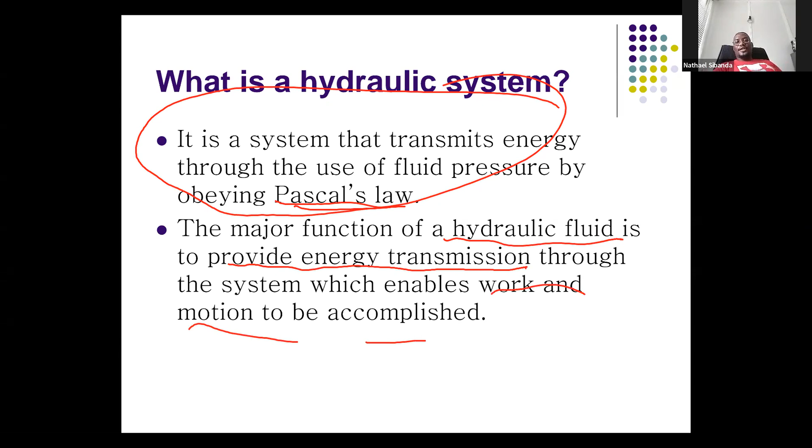So the major function of the hydraulic fluid is to provide energy transmission through the system, which enables work and motion to be accomplished, right? The major function of the hydraulic fluid is to provide energy transmission through the system, which enables work and motion to be accomplished. All right.

So, Pascal's law, guys, says the pressure applied to a confined liquid is transmitted without loss throughout the entire liquid and the walls of the container. And that is what I was saying before. Let's say you have a container like that, and then you have a piston here that you can press. Here you have your foot pedal. This is the liquid here.

They are saying if you apply a force here, that force per unit area will become pressure pushing on this liquid. This pressure will be equally distributed in all directions and on the walls of the container. So the pressure applied to a confined liquid is transmitted without loss throughout the entire liquid and the walls of the container. That's Pascal's law. So take note of this and memorize this law by heart.

Now, this application of Pascal's law leads to this. These guys were jealous of each other. Like Newton: if you read science books well, you'll find that many of Newton's discoveries came from his cleverness or manipulation. If someone discovered something but had no money or means to sort out patents, which was difficult in the old days, people like Newton and the other moneyed ones would say, on your behalf we'll do this, and then it appears in their name. But others, such as Pascal, were not as popular as Newton.

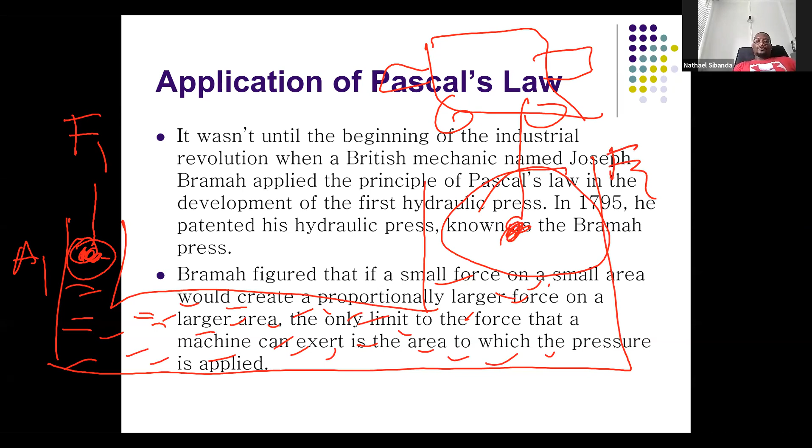He discovered that if you apply a certain force F1 at a certain cross-sectional area A1 of this piston, you get a certain force F2 going upwards at area A2. So if this force is applied down on this side, another force will go up. But Pascal said the pressure applied on this liquid will be equally distributed throughout. Which means the pressure P1, which is F1 over A1, must be equal to P2, which is F2 over A2, because of Pascal's law.

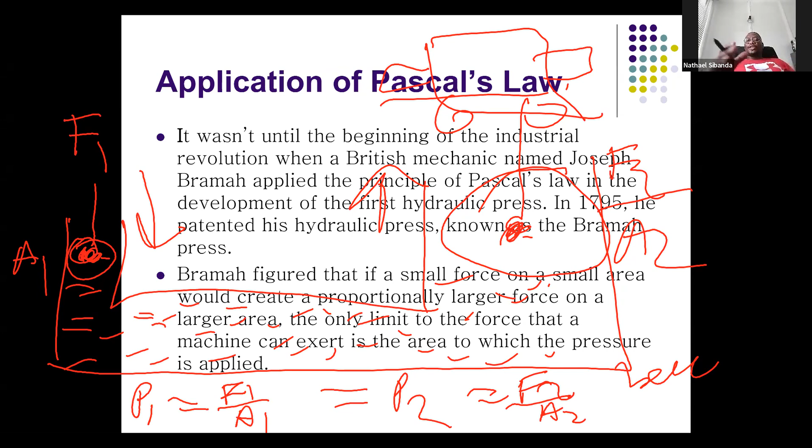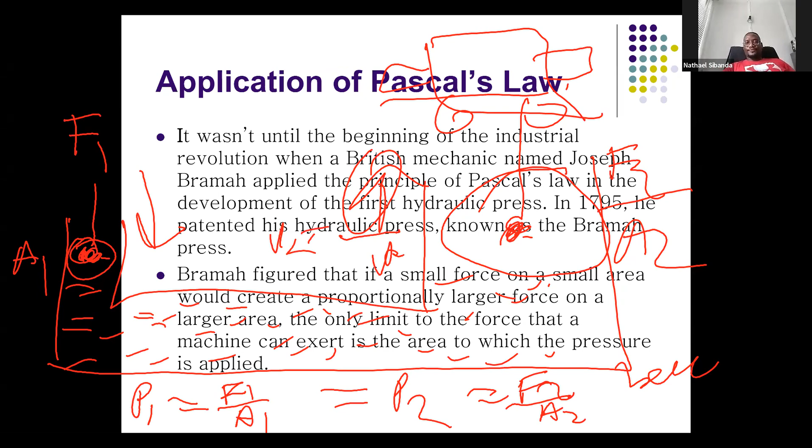So that's what Bramah discovered: if you apply pressure at a small area on a hydraulic fluid, it will transmit that pressure equally without loss through the liquid and the walls of the container. Hence, you will receive a force F2 over area A2, which is equal to P2. But basics, before we go too far: pressure is equal to force per unit area. That's basics from high school, or from maths, that you should remember.

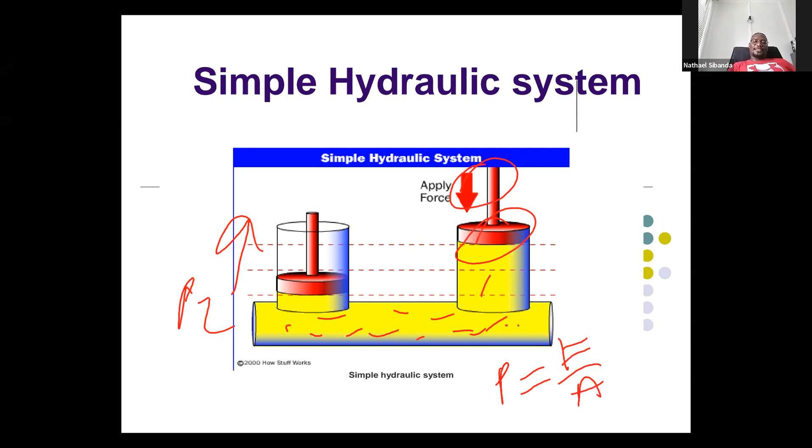Now, this is what he discovered: if you apply a certain force here, the pressure P1, which will be F1 over A1, will be equal to P2 on the other side, which will be F2 over A2. So Pascal's law says P1 must be equal to P2.

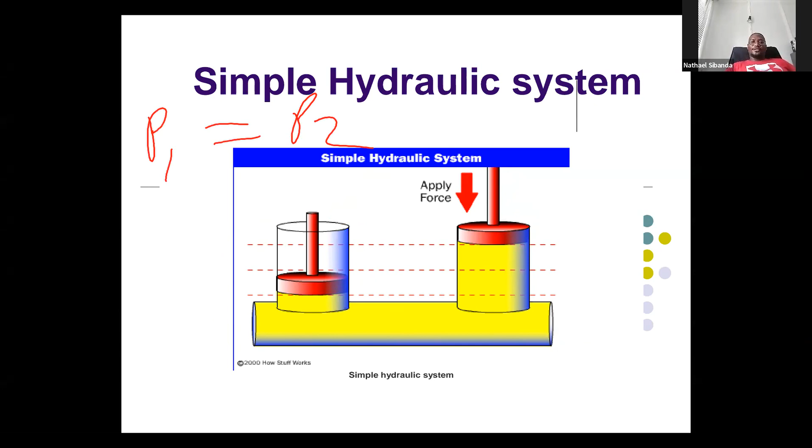So examples of hydraulic systems, guys, are the one I was talking about, a hydraulic jack: a car is pushed up just by your small foot pressing a certain button, and the car on the other side is suddenly lifted up. How wonderful is that? This was the work of Mr. Bramah, Pascal. And the other example we talked about is the jaws of life.

The jaws of life has saved a lot of people's lives. The jaws of life machine is very popular. If you go to YouTube or Google right now and type jaws of life, you will see the machine. This is a well-known practical that is done by grade 8s and grade 9s out there in the schools.

They do this one every time, it's never missed - the jaws of life. This is through the application of Pascal's law, where they use a hydraulic machine to cut metal. When a car crashes and the doors are crushed and somebody can't get out, they bring the jaws of life machine, which is a hydraulic machine. It cuts through the metal and people are taken out. Sometimes it opens metal apart, acting like a caliper, pulling something apart. Sometimes it's cutting - it's the jaws of life.

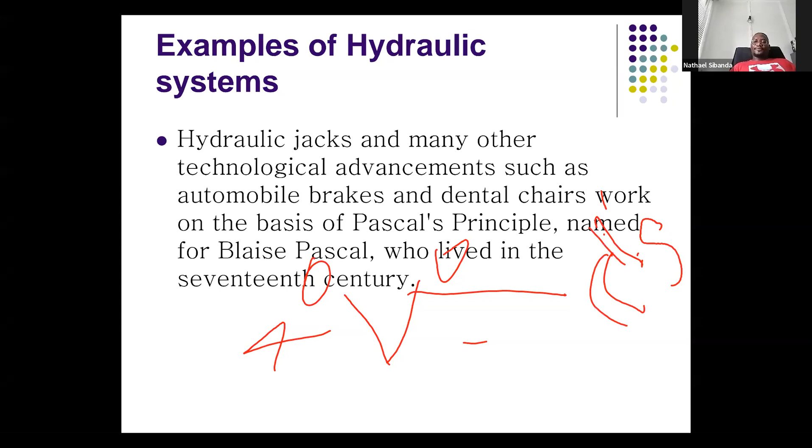It cuts metal to open. It's another example of a hydraulic system, which is Pascal's law or Pascal's principle. Remember, Pascal's principle is the most important aspect here. Once you know Pascal's principle, then you know what pressure is - force per unit area. The rest is easy, the rest is eating cake.

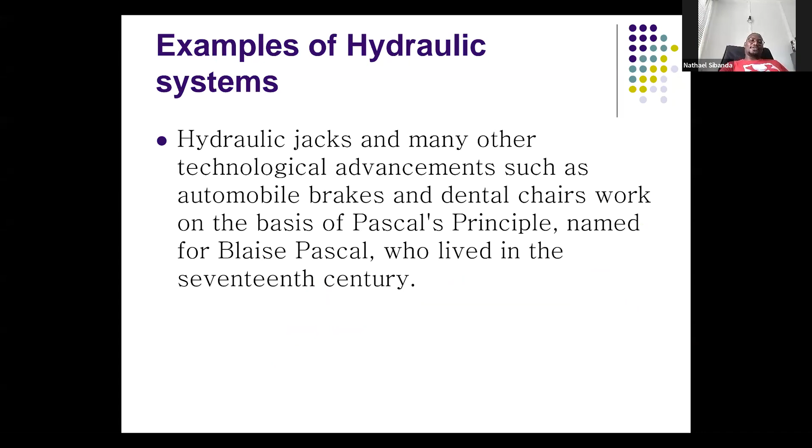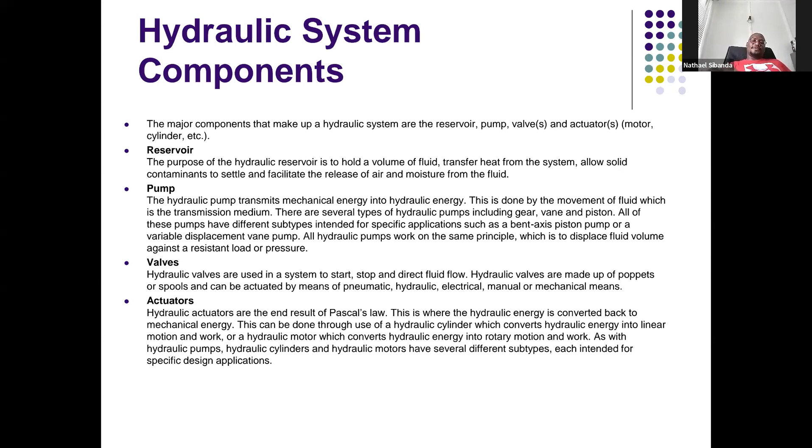So the components of a hydraulic system are like this. There's what is called the reservoir. The purpose of that is to hold the volume of fluid, transfer heat from the system, allow solid contaminants to settle, and facilitate the release of air. So if we draw it in layman's terms, the simplest one which we use for calculations - put the liquid there. This tank right here is the reservoir.

And then there's what is called the pump. The hydraulic pump transmits mechanical energy into hydraulic energy. This is done by the movement of fluid, which is the transmission medium. For example, now you're pushing down there - that's more like you're pumping.

And then there are valves. Hydraulic valves are used in a system to start, stop, and direct fluid flow. Everyone knows a valve - a tire is a valve. You press it, air comes in, you open the channel there. So if you have a pressure pump, once the valve is pressed, you can push air inside. If you don't have a pressure pump, the air inside will be forced down. A valve, you know it.

And then there are actuators. Hydraulic actuators are the end result of Pascal's law. This is where the hydraulic energy is converted back into mechanical energy. That's the other side of the arm. So if you have two arms like this, the other side is where now this pressure is pushing something up - that's where there's an actuator. This is where the hydraulic energy is converted back into mechanical energy, pushing, lifting, etc.

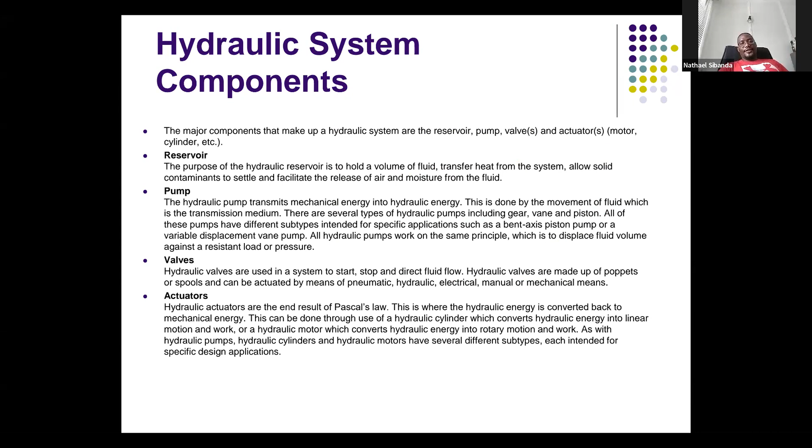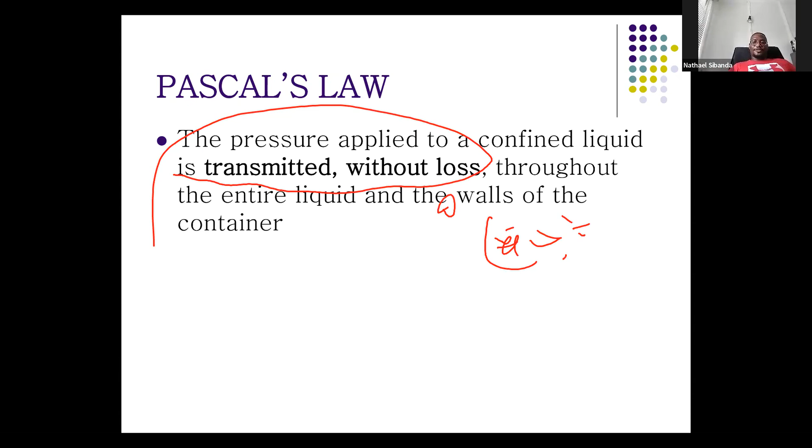To repeat again, Pascal's law says the pressure applied to a confined liquid is transmitted without loss throughout the entire liquid and the walls of the container. But you do realize, guys, that when we are studying here we're using the ideal characteristics - that it's transmitted without loss. But in real life you know that there's no such thing. There's always going to be an air bubble in the liquid, forcing it not to work 100%. So it will have an efficiency of somewhere around 80%, 75%. It will still work, but not 100% perfect. But for the purposes of calculation and simplicity, when we're studying, we use ideal circumstances.

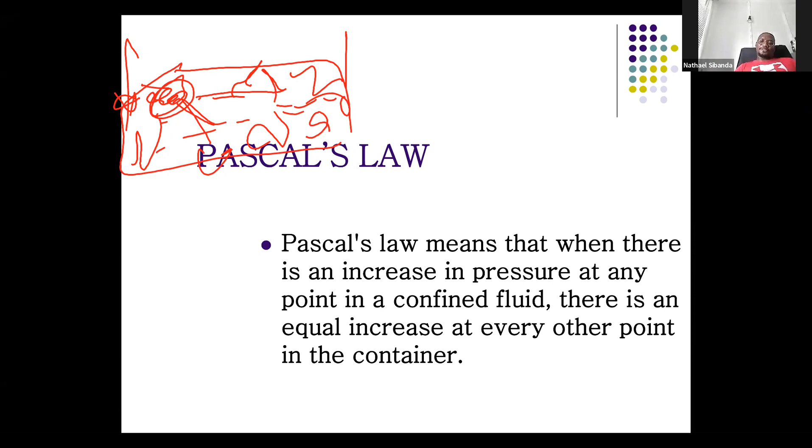Pascal's law means that when there is an increase in pressure at any point in a confined fluid, there is an equal increase at every other point in the container. We explained this so that when theory questions come, people should be able to actually model this kind of question, and should be able to actually kill it. If there is an increase in pressure at one point here, that means that pressure will be equally distributed throughout everywhere without loss, even to the walls. That's what Pascal discovered, and that's what Pascal's law means. I think the emphasis on Pascal's law has been enough now - this basic idea has been covered enough.

We have covered it. So this is the example that we were talking about a few moments before. Mr. Sibanda here will come with his small feet and press here, and then suddenly a big car is being pushed or lifted upwards. This is an example of a hydraulic jack.

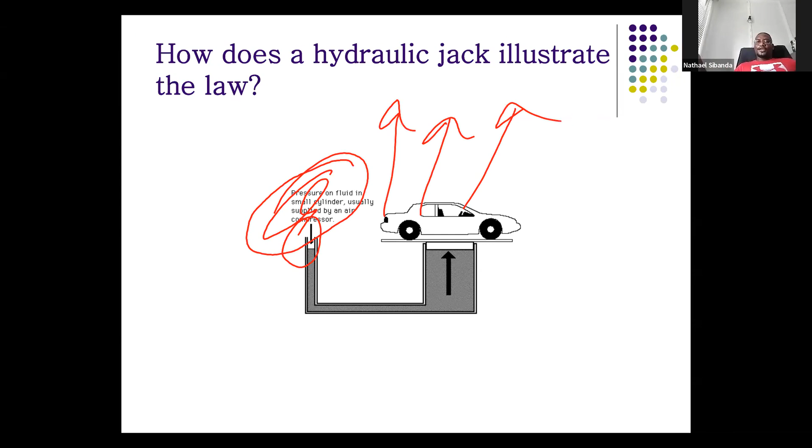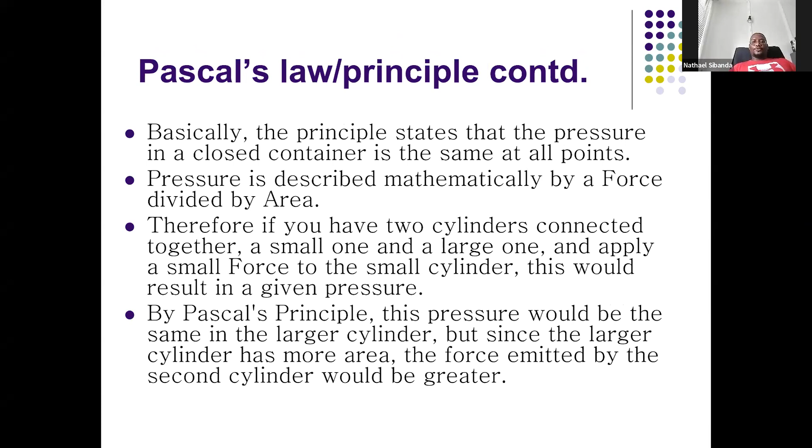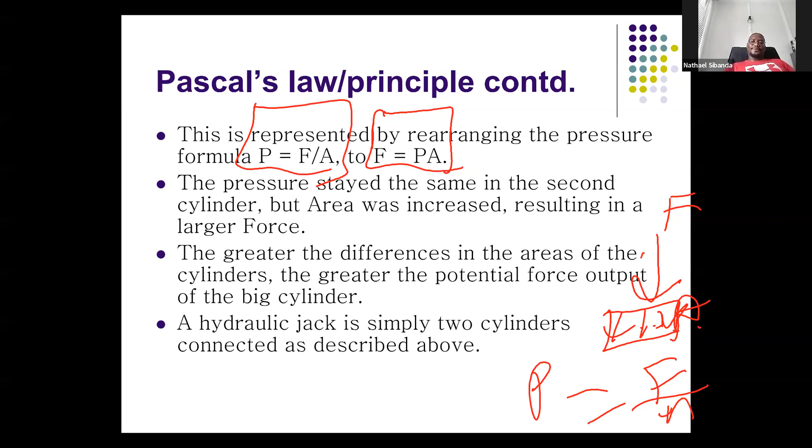Now we need to come to calculations of these things - practice. All this we have covered, now we need to practice with questions. We've mentioned that pressure is force per unit area, such that force at the end of the day is pressure times area. So whenever you have a force exerted on a certain area - this is a cross-sectional area - pressure is force per area, that's what pressure is. So the greater the differences in the areas of the cylinders, the greater the potential force output of the cylinder.

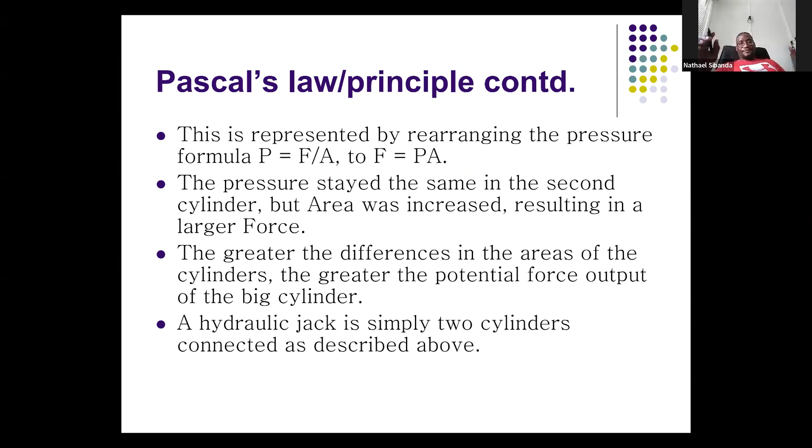Now watch this, let's explain this one clearly. Let's draw it - this is the same thing here, but let's draw it this way. Let's draw another one that way. Same thing here, same thing here.

Right. Now, look at this one. Call it part 2. Call that one part 1.

What they are saying is this: for example here, you're going to have F1 and A1 on this side, then on this side you're going to have F2, A2. By inspection, which means by looking, automatically A2 is greater than A1.

Automatically, by looking, A2 is greater than A1. The cross-sectional area here, A2, is greater than the cross-sectional area there.

So if we have P1, which is equal to F1 over A1, which must be equal to P2, which must be equal to F2 over A2, then in order for this pressure here to be equal to that one, that means this force must also be big, so that a bigger area onto a bigger force will give us the same pressure like that one.

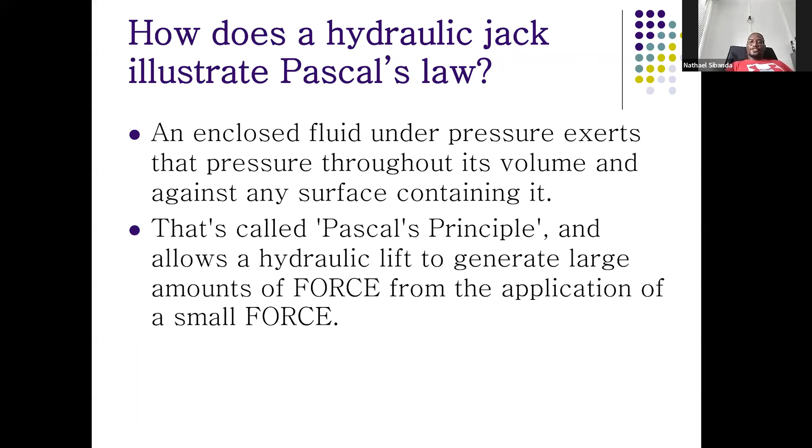This is also something we can do as an example. They are saying, assume a small piston, 1 square meter. You are given A1, so usually I like to draw these things, so that when you draw something, you always remember. Let's call this side A, and this side B.

So let's say A1, area 1, you're given there, and that provides a pressure of 1 Newton per square meter. So assume a small piston, 1 square meter, applies a weight of 1 Newton. We're also given, why is this thing doing this?

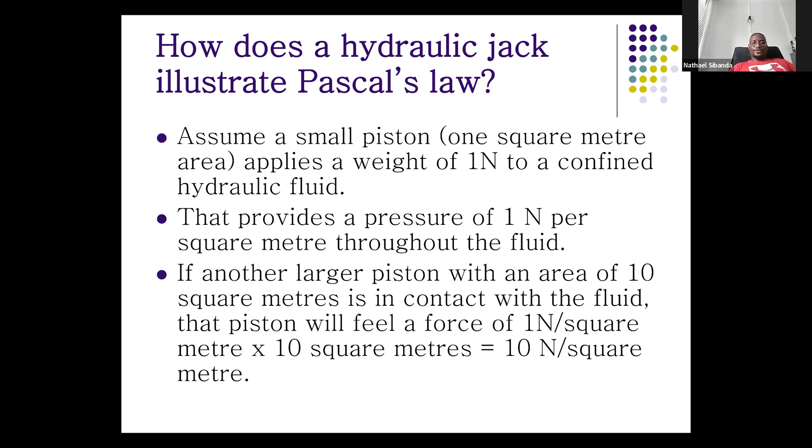We're also given F1 on the side. So F1 is... I don't know what's happening to my pen, guys. It's refusing to write, but I have to go to the next page. It's giving me problems here. Next page has something written. Let's do this, we'll come back to that.

Let's use this one now, let's use the whiteboard. Right, they said, for example, let's use our own example there.

What's going on? My pen is refusing to write. Jesus Christ, sorry about this guys, everything is a mess. What's going on? Everything is becoming a mess.

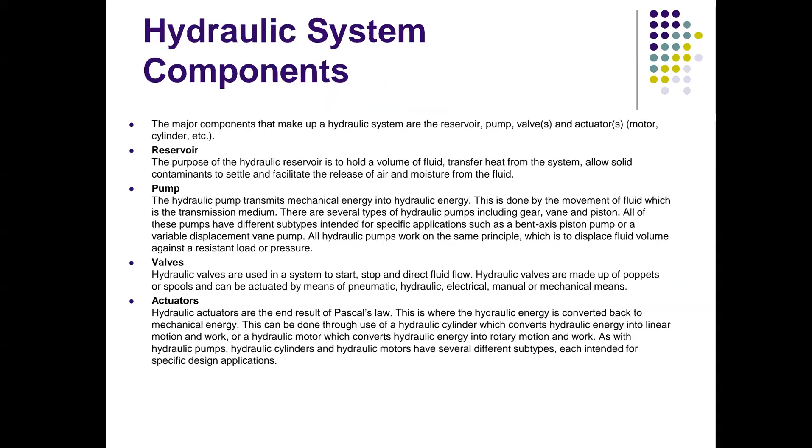Let's start it from scratch then and see what it will do. It should behave, it should behave. We've started it from scratch, let's hope it will behave now. Right, let's hope it's gonna behave now.

So I would like us to draw this thing here. Put our diagram and say assume a small piston. There will be a small piston here, and then obviously a big piston there, 1 square meter area, such that the side of A1 is equal to 1 square meter. It applies a weight of 1 Newton to a confined hydraulic, so F1 here is equal to 1 Newton. So which means P1 is equal to F1 over A1, which will be equal to 1 over 1, which is 1 Newton per square meter.

So they said assume a small piston, 1 square meter area. We put the area. Applies a weight of 1 Newton - we put 1 Newton applied here to a confined hydraulic fluid, which is here. Then it will provide a pressure of 1 Newton per square meter. We did that there.

If another piston with an area of 10 square meters - so now we have A2 equal to 10 square meters - is in contact with the fluid, that piston will feel a force. So what will be F2 here?

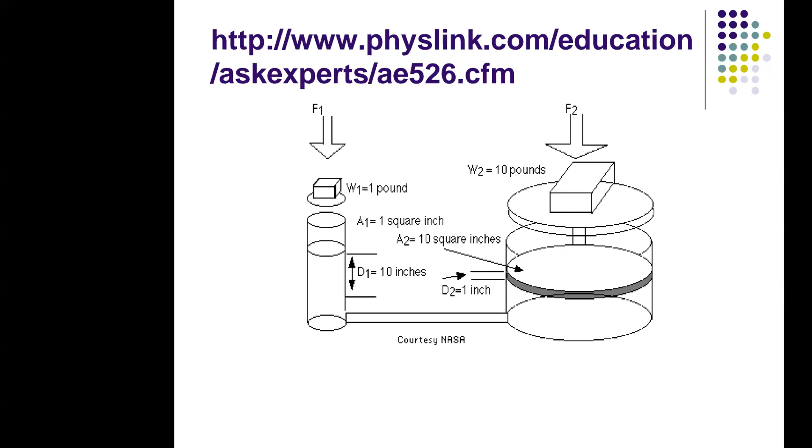Now this is another link which you guys can go to and watch and see how this was done, practice, etc. That's another link that you can go to.

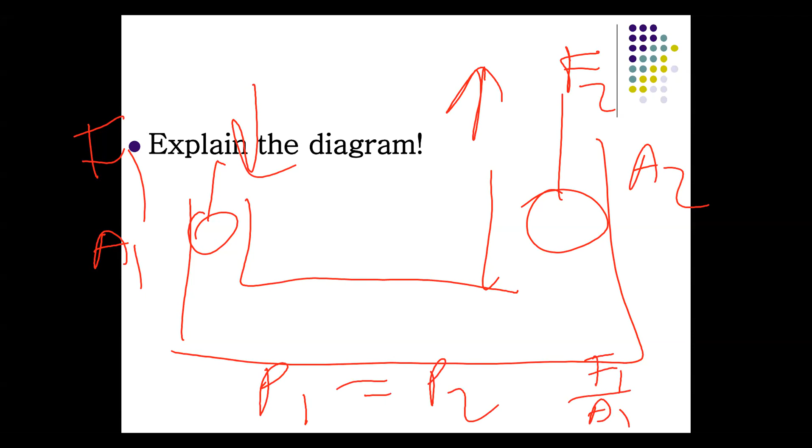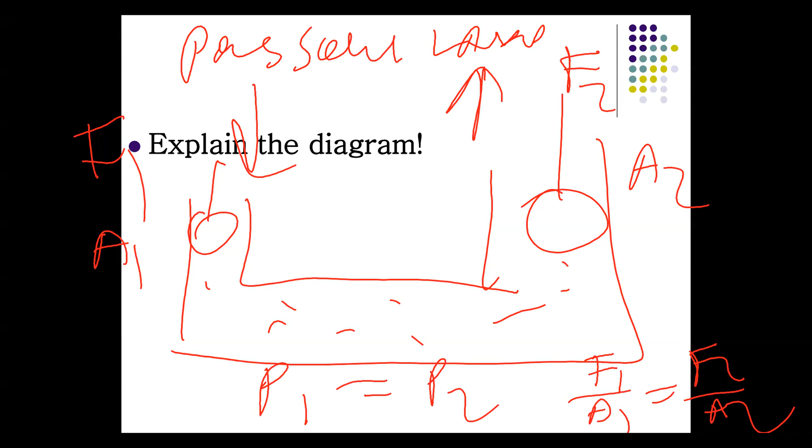So here is another example. Now this is what I wanted to tell you about, something to test your knowledge. You see guys, there was something that Sarah put across, she was asking me that magnetism, we hadn't covered it on test one.

So, but the marks you asked us there, you tested there. No, magnetism wasn't supposed to be covered in this class because it's supposed to be something well known from high school and primary. But however, I had to cover it because I know there are some comrades who have forgotten, and I saw that some comrades were struggling. So that's when I had to cover it.

So here is another example now. We're doing Pascal's law. I've given you force and area etc, but there comes a question where you have to apply yourself. That's why it's called - if you check the UKZN logo, it says...

Transformative learning. That means whatever we are teaching you, you are not going to come across it in life exactly as it is. We are trying to make you somebody who can adapt, who can use the tools that we've given you to learn more and be creative more and solve more problems out there. That's what the logo, the motto of UKZN is all about - transformative learning. Even you yourself, when you go out there in the classes that you're teaching, you're not trying to teach your students to always expect everything that you give them.

Then another one will want to link where the binary comes from, that it's digital to analog. But you won't have that basic knowledge if I didn't say, okay, let me go an extra mile and cover the comrades here so that the understanding becomes easy. When they meet an inquisitive student, they can now blow their minds, right? So it's like that, guys. Some things are general knowledge. Same as with the explanation here.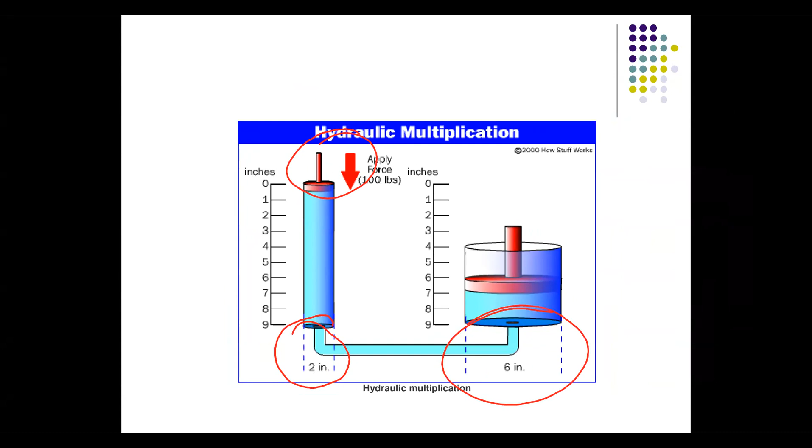We're expected to find F2. So you must find out what F1 in pounds will be in terms of newtons, right? Then with these inches, the area is going to be pi r squared, right? You're going to convert 1 inch to meters so that you put it in and find your area there. And then area 2 there, pi r squared. It will depend on these 6 inches, but we don't use inches. We use meters as our SI unit. The whole world's standard SI unit is meters. These inches, pounds, this is American or British, I don't know.

So you're going to have to be careful when answering those questions. Because mathematically, if you keep your working using these things, mathematically it will be correct. But standard SI units wise, it's not.

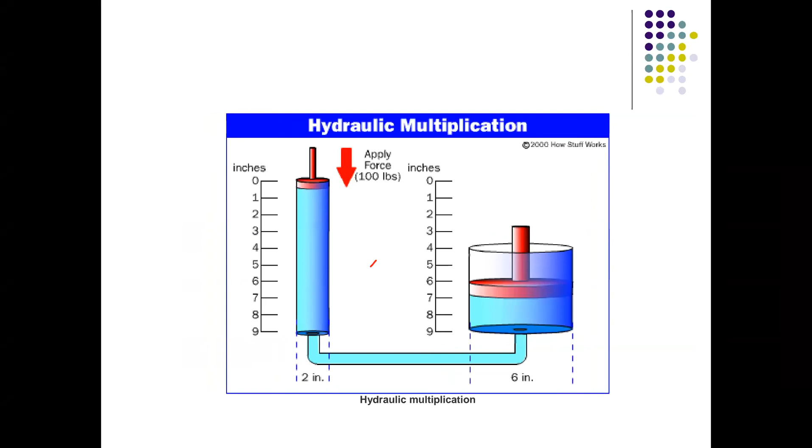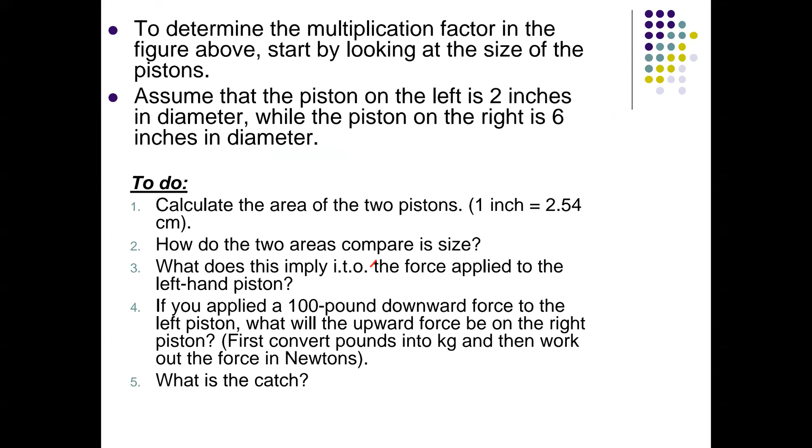So here is an example concerning this question here. Here is an example which says to determine the multiplication factor in the figure above. Start by looking at the sizes of the piston. Assume that the piston on the left is 2 inches in diameter, right? That's what we saw here, 2 inches here. It's 2 inches, then the other one is 6 inches, right? So what you need to do, you're going to have to calculate the area of the 2 inches. You see, they're already giving you 1 inch is 2.54 centimeters.

How do the areas compare in size? Obvious, A2 is greater than A1, right? What does this imply in terms of the force applied to the left-hand piston? Simple, we said it. If A2 is bigger, which means F2 is also bigger than F1. Pascal's principle. If you apply the 100-pound downward force to the left piston, what will be the upward force? Approximately, I'm guessing, F2 will be F1 times 9, right? But you can do the proper calculation using F2 is equal to F1 over A1 by A2. This is the proper calculation. You get an answer, but it's supposed to approximate to that.

And then what is the catch? The catch is that we're applying a small force per small unit area, right, to get out a bigger force on a bigger area, right? That's working smart, isn't it? That's what we want machines to do for us. We want a machine to make the work easier, right?

That's why we use a long crowbar to open. You see bus tires or truck tires, they're bolts. Have you seen how they take out this nut? They use a long ratchet, which is a long handle there, because class one lever, small effort, bigger force on the load. See, same thing, we want our machines to do the work for us. We want to apply a small force to get a bigger force.

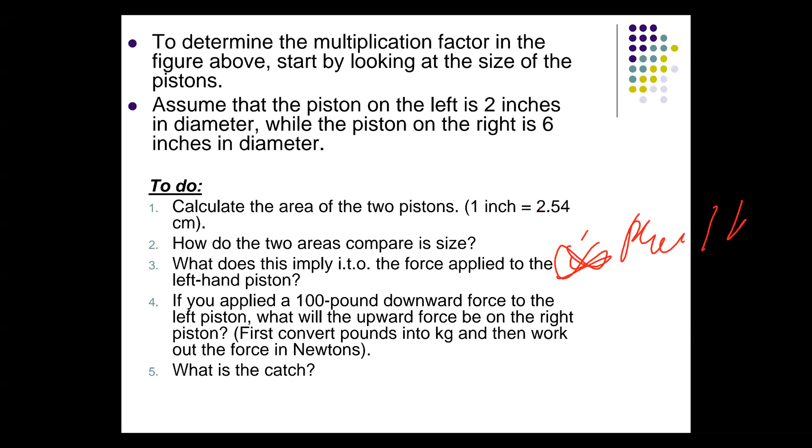So this is an example. If you're given pounds and inches, how are you gonna go about it? Convert the inches to centimeters, convert the lbs to kilograms and newtons. This is the same thing that we've been talking about.

Here is example 2. Right, the pistons of a hydraulic press have radii of 2 centimeters and 12 centimeters. So you know that now we have R1, which is 2 centimeters, which is 2 over 100 meters. Then we have R2, which is 12 centimeters, which is going to be 12 over 100 meters. Right. So they are saying what force must be applied to the smaller piston to exert a force of 5,000 newtons on the larger piston. So they gave us F2, which will be equal to 5,000 newtons.

Now draw your thing. There is our normal diagram. Then we come here, small piston, large piston. F2 here, we're given it as 5,000. F1 is what you are looking for. Right. So now let's calculate the areas. The cross-sectional area of a piston is round, right? So it's exactly pi r squared, right? So A1 is pi r squared, which is pi times, what is radius 1? 2 over 100 squared. And then area 2 also is pi r squared, which means it's going to be pi times 12 over 100 squared, right? So you have those two.

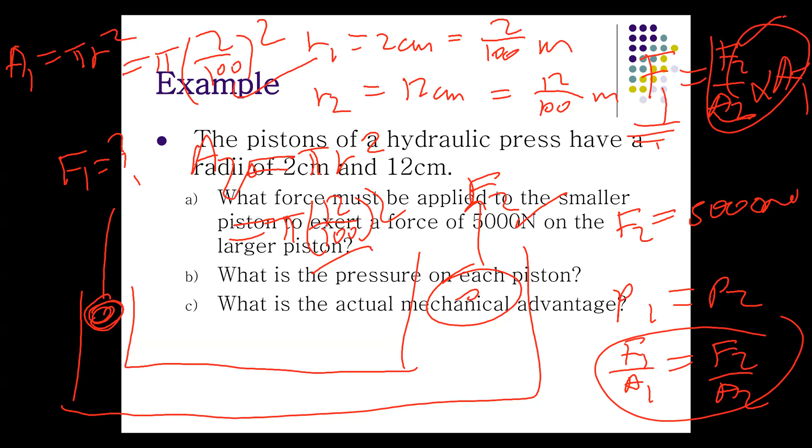Now this is your time to shine, guys. This is the time when you say, Manera, there, I can't understand, there's a problem, and then we repeat things. So that when you come to the exam, you just get 20 marks for free on hydraulics. And you're home dry, you only need now 30 to get to 50. So shine, comrades. Ask where you don't understand, and let's explain to the comrades. So is that clear so far?

Right, the comrades are quiet. Then that means things are clear. Yes, and then yes, sir, it is clear. Someone says, please repeat that example. All right, we will repeat.

So next week Thursday, will the test start at the lecture time for Thursday, which is 12:10? Yes, we're going to start exactly at the lecture time. But we wrote that we are given the venue from 12 o'clock to 2 o'clock. All right, we're given the venue from 12 o'clock to 2 o'clock.

All right, guys, now that we've answered Hannah, Ntogozo said, please repeat. Finally said you were too fast. And Ntogozo also said, please slow down. All right, we'll redo this question again. But I want you to remember this because I want to go to white space, right? I want to use the white space because that is not clear. Let's use whiteboard, right?

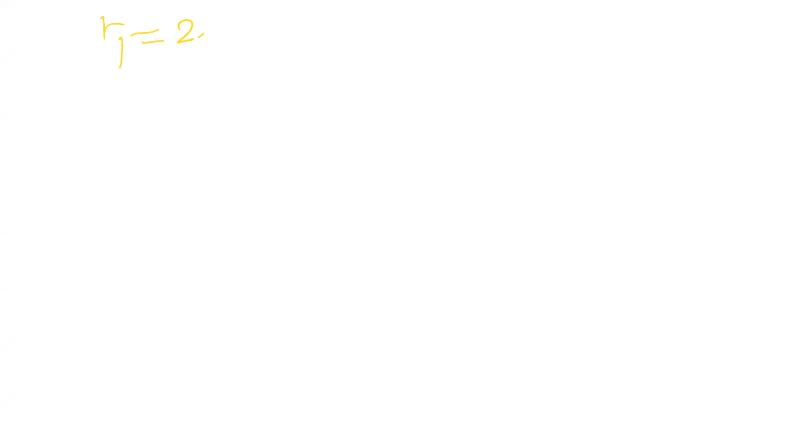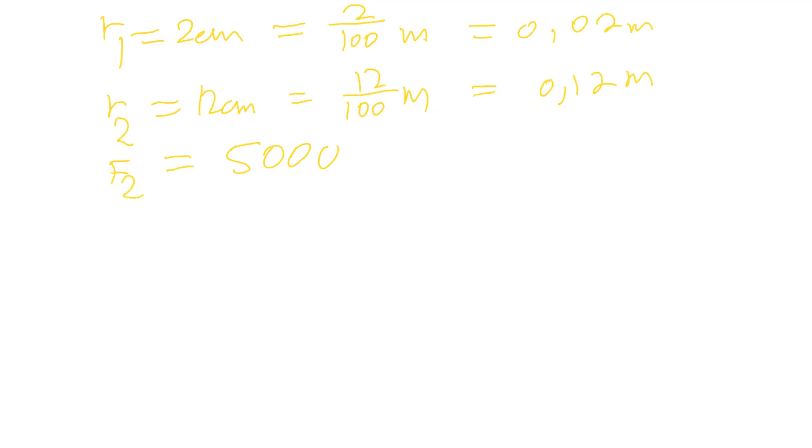So we are given R1 as 2 centimeters, right? Which we convert to meters this way. It's 2 over 100 in terms of meters. And then we are given R2 is 12 centimeters, which is equal to 12 over 100 meters. This is going to be 0.02 meters. This is going to be 0.12 meters. And then we are told that F2 is equal to 5,000 newtons from the question. And then we are told to find F1.

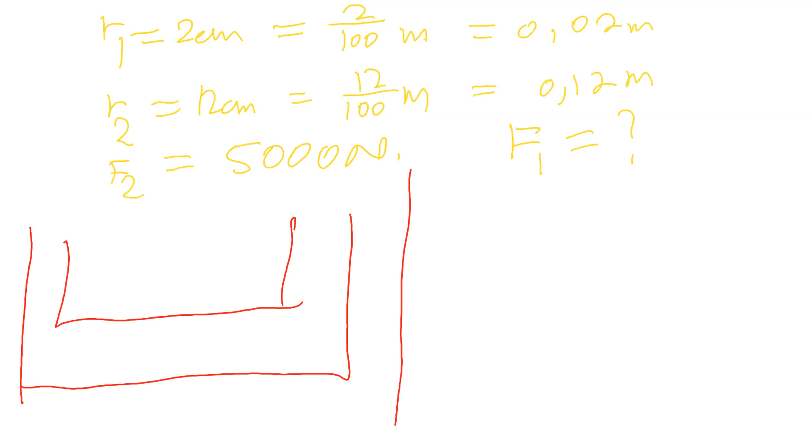So let's draw how our problem looks like. This is piston 1, this is piston 2. This is where F1 is applied going down. This is where area 1 is. This is where F2 comes out, which is 5,000 newtons. Then this one is going to be area 2. So Pascal said the pressure applied from the smaller side is equally distributed throughout the medium, such that it becomes the pressure on the other side. Hence, P1 is equal to P2, right?

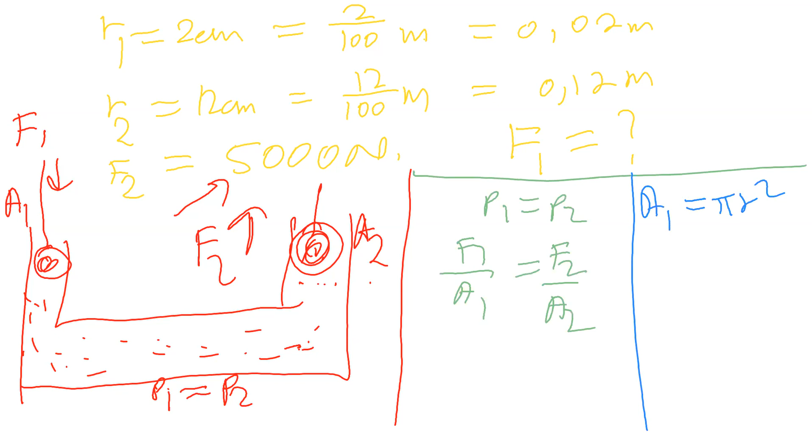So once we have established that P1 is equal to P2, this means that F1 over area 1 is equal to F2 over area 2, right? But then we can calculate area 1 and area 2. Area 1, we're given radius 1, is pi r squared, right? So it's going to be pi times 0.02 meters squared. And then area 2 is going to be pi r2 squared, which is pi times 0.12 meters squared, right?

Then to get F1 now, we rearrange the formula to make F1 the subject, such that F1 is going to be F2 over A2 times A1, right? F2 we're given is 5,000. A1 we calculated. A2 we calculated. So punch these values on your calculator, you get your value for F1. Right, clear now? Yes, sir. Wonderful. Now, if it's clear, comments.

Slindile, you have to know the formulas, but I'll give you a few of them. But if you don't understand them, it will just be a waste of your time. I can supply you with a formula sheet, no problem there. But in my understanding, the way I was taught, the formula sheet always wastes your time. You browse through the formula sheet, go back to answer, go back to the formula sheet, go back to answer.

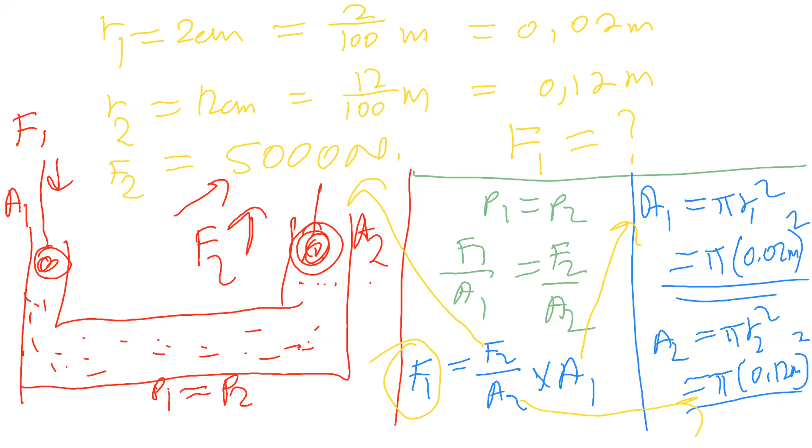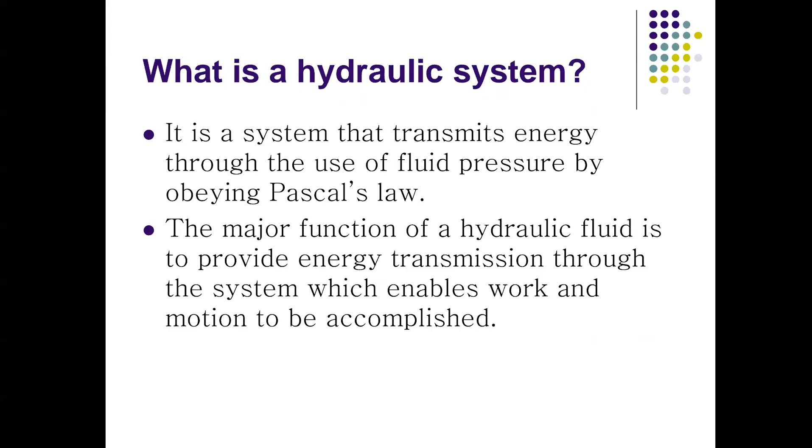So now, part A of the question has been done. Now let's go to part B. So now I have to go and find it again, comrade. It disappeared. Sorry, this is not the one I want to put. Accidentally put this one. So let's go back to part B of the question. Skip, skip, skip, yeah. So we are here.

Part A is done, right? So now they are saying, what is the pressure on each piston? That's easy. F1 over A1 is equal to F2 over A2, which is equal to the pressure. Pascal's law, remember Pascal's law. So you have F2, you have A2. We calculated A2. Punch on a calculator. So that is 5,000 newtons over A2, which was pi times 0.12 squared, right? You get your pressure.

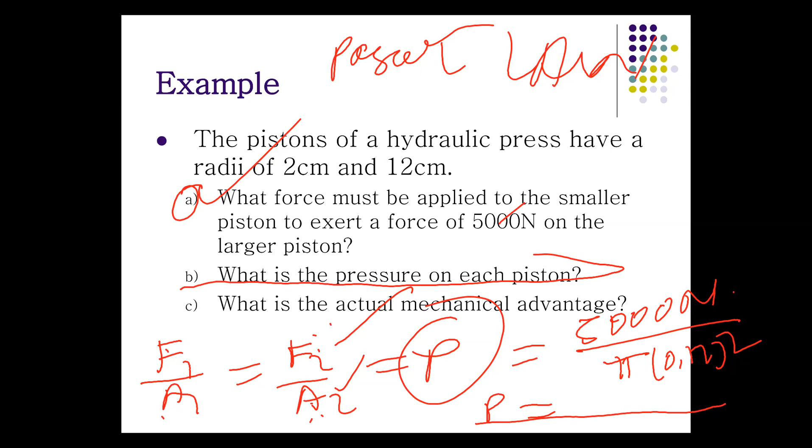Remember, we calculated A2 as pi r squared, which was pi 0.12 squared. Our F2 we're given is 5,000. So pressure is F2 over A2 equal to F1 over A1 by Pascal's law principle. Hence, you get your pressure, right? And then they say, what is the mechanical advantage? So, mechanical advantage is equal to load over effort.

Right. The force load over the effort force. So to make things easy, we will do it this way. We will find F1. We say F1 will be equal to F2 over A2 times A1. Remember? And then we say F1 will be 5,000 newtons over pi 0.12 squared, times area 1, which was pi by 0.02 squared. Right? So pi cancels out, right?

And then now we're left with F1 is equal to 5,000 times 0.02 over 0.12 squared. You guys have a calculator, punch in the values and tell me what F1 is. I don't have a calculator. Let me see. I have to use my phone now.

You see what I'm talking about, comrades? You are depending on me to calculate, but you have a calculator there. You won't learn when you do that. You will always be in trouble. You see, still no one has put an answer there. Matata. How are you going to answer it then if you are waiting for me? I won't be answering that day.

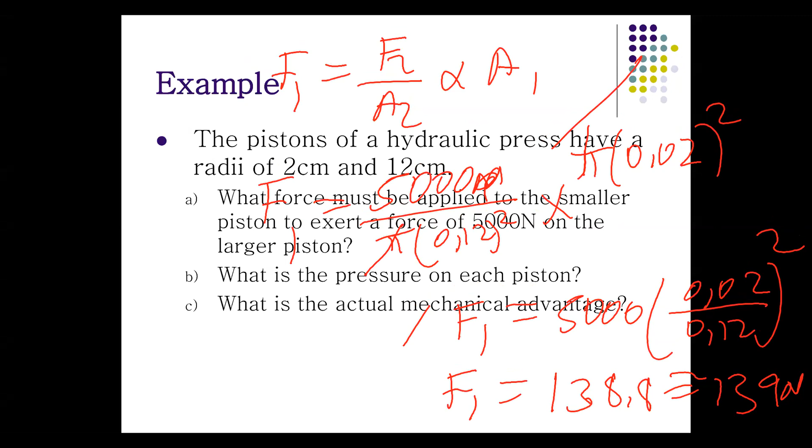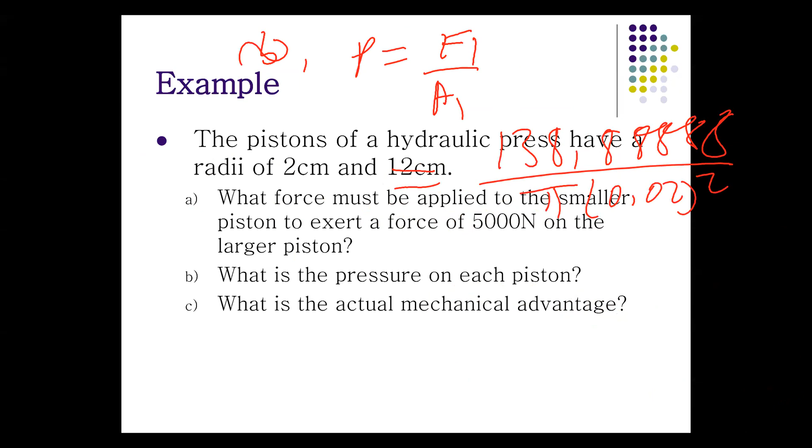So part A has been answered, right? Now let's find part B. P is going to be F1 over A1. So which means it's 138.88888 over pi 0.02 squared. So punch. Also, somebody else do this one. Say pressure is equal to F2 over A2, which is equal to 5,000 over pi 0.12 squared. Someone also punch this one. Should give us the same answer or approximately the same answer.

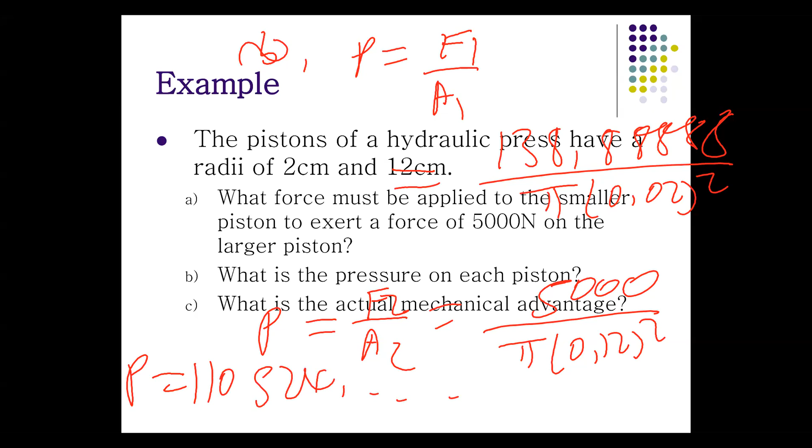What is the answer, comrades? Please punch in the calculator and tell us. I don't have a calculator here. Anybody? Okay, I'll try and do it myself now. Let's see, somebody has punched, they say P is equal to what? Let's go and look. Right. 110,524. Right, thank you. 110,524 point something something. Right. So see, easy peasy, pressure has been found.

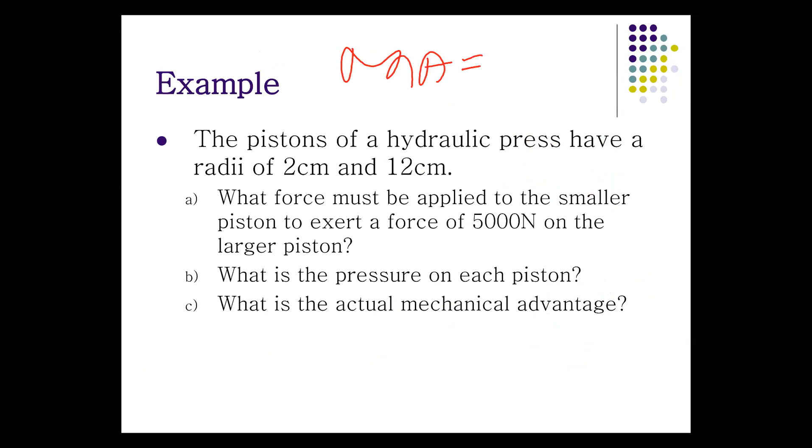And then now, what is the actual mechanical advantage? Part C. Now, MA. There is a difference between actual mechanical advantage and mechanical advantage, as you're going to learn. But MA now is equal to load over effort. Now, we have our diagram like this. It says what force must be applied to the smaller piston to exert a force of 5,000 on the larger piston. So this is output, F2, then F1 is input. So hence, that's effort, the force that we want to apply, and this is load, right?

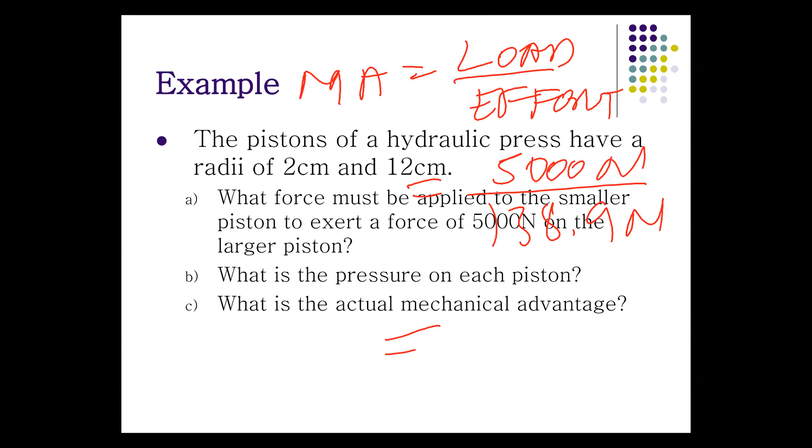So MA is load over effort, which will be 5,000 newtons over 138.9 newtons, right? Which you will get something like what, comrades? Something like 35.9. Right. So this is a very, very good machine. It has a really good mechanical advantage.

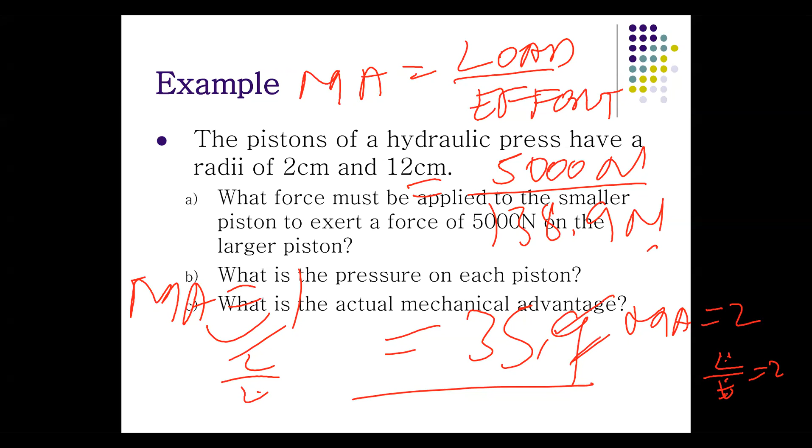Simple and straightforward. So for instance, if someone says a machine has a mechanical advantage of 1, what does that mean? If MA is equal to 1, that machine is not good. Load and effort are equal. You apply a big force to lift a big force. That's a bad machine. But if the MA is equal to 2, load over effort is equal to 2. That means 2 times the effort's load is lifted. The bigger the MA, the better the machine. The smaller the MA, the worse the machine.

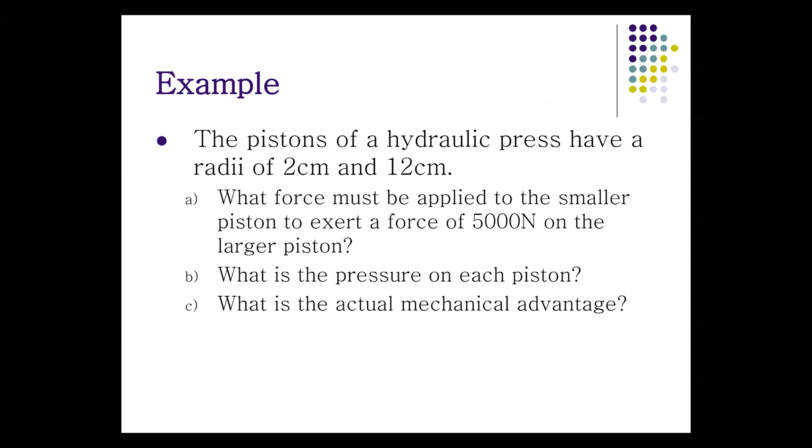All right, comrades. Let's see on the chats. Someone was giving us an answer. That's good. And then that's it, guys. Nothing much on this. You expect such a question, simple and straightforward. Nothing hard, nothing weird. So here is another example.

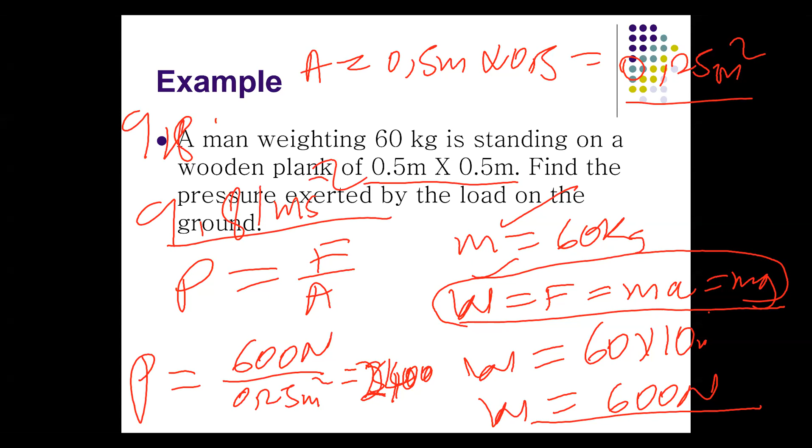If I may ask, why did you use 10 instead of 9.8 where there is mg? That depends on you. The real value for proper calculations is 9.81 meters per second squared. But for calculation purposes, are you able to play around with decimals? If you're comfortable with that, you can use that. But if you read textbooks, on calculations we approximate it to 10 meters per second squared. But if you're comfortable with 9.81, it's fine. Thank you very much. All right.

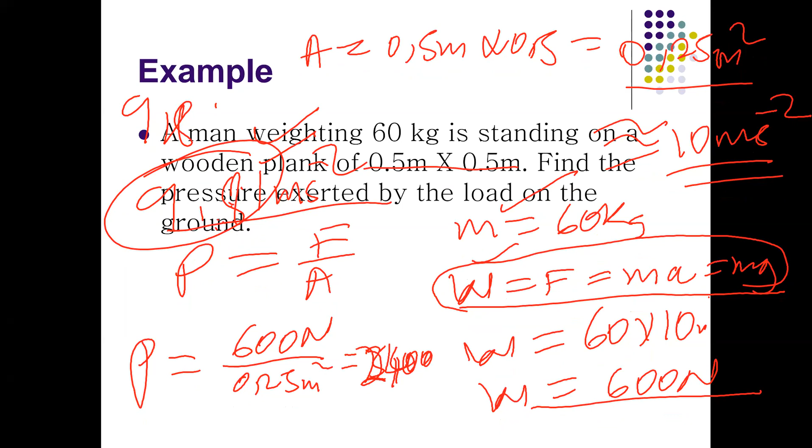And then somebody had asked a question on chat. Someone said g is equal to 10. That one we have explained, 10 for convenience. What's the unit of pressure? That's newtons per meter squared. You can actually use pascals if you want. 1 newton per meter squared is equal to 1 pascal. Or you can use atmospheres. But for your calculations, newtons per meter squared.

You can use pascals, you can use atmospheres, but atmospheres are used when you're dealing with gases, right? Pascals are used when you're dealing with fluids. So if you use pascals with me, I am fine. If you use atmospheres, it's like you're dealing with gases, so it doesn't apply. But if you use newtons per meter squared, it's still fine for SI units. This you can use, this you can use. But atmospheres are for gases, right?

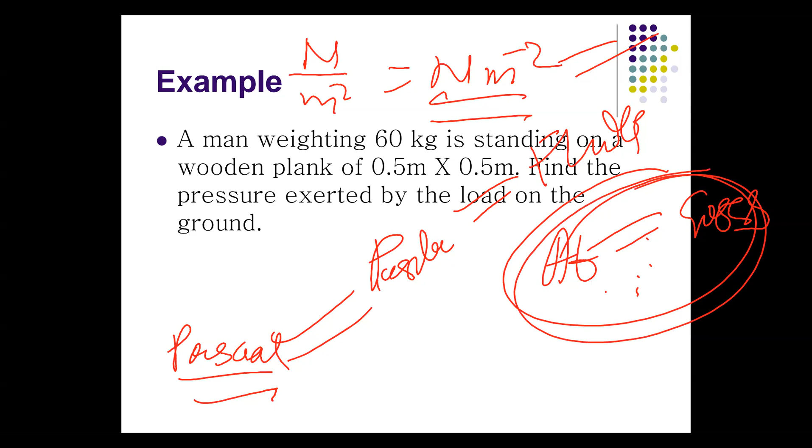And then there was another question there on the chat. Just go and see. And what else? I think I forgot. Oh, Hannah, I answered her. Now, let's see the hands there. Bonambi, your hand is still up. Okay, now there's Kanyile. Kolani, you can go ahead.

When we were exploring calculations on actual mechanical advantage, you said there is a difference between actual mechanical advantage and mechanical advantage. Can you please explain that difference? Right. There's what is called just mechanical advantage, not part of your course, but for learning purposes. And then there's actual mechanical advantage, then there's IMA. Mechanical advantage is when you're dealing with ideal situations, assuming no losses in your system. So if someone says find the mechanical advantage, the system has no losses.

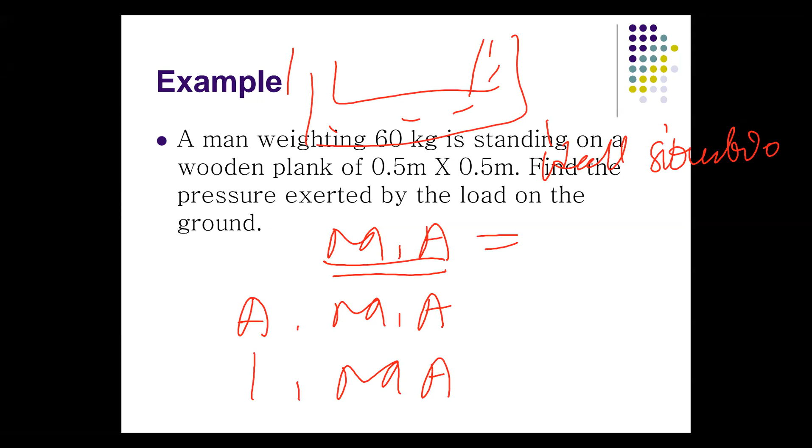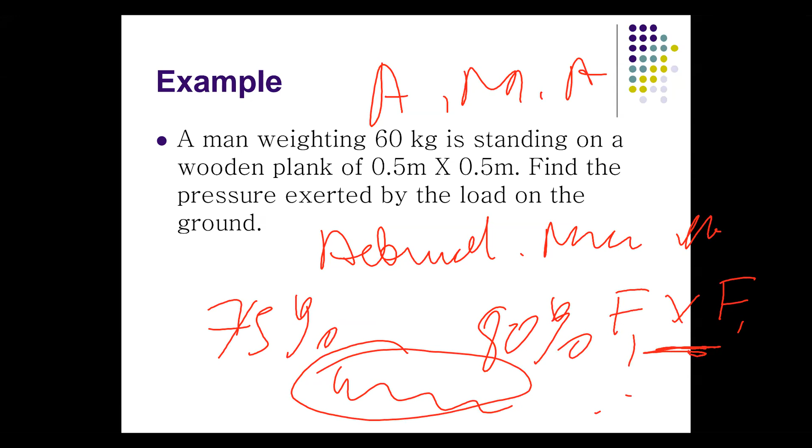But if they say find the AMA, actual mechanical advantage, now that's a different story. They would have given you that your machine maybe is 75% efficient or 80% efficient, which means there are losses. So whatever you are calculating, your input and output, there will be losses on that system. So actual mechanical advantage is when you're given a real-life situation which has losses. And then there's something called IMA. This is velocity ratio, right?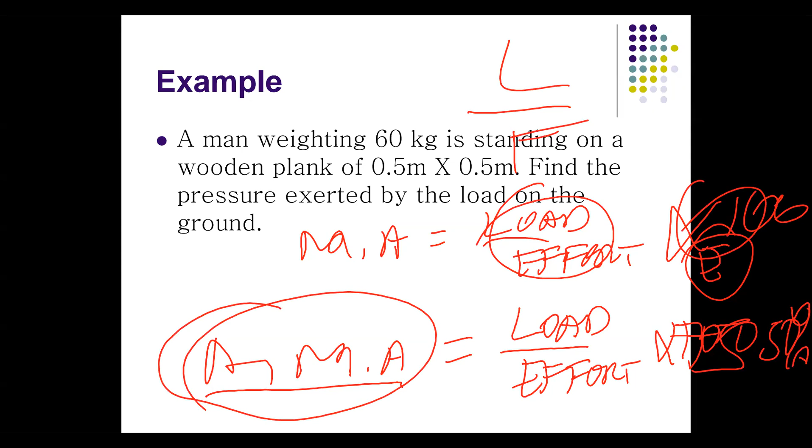So if you're given efficiency of 75, use 75 there. Efficiency of 50%, use 50% there. If it's an ideal situation, you use 100. Hence, that's why here we don't use 100, we just say L over E. This one is influenced by the efficiency of your device.

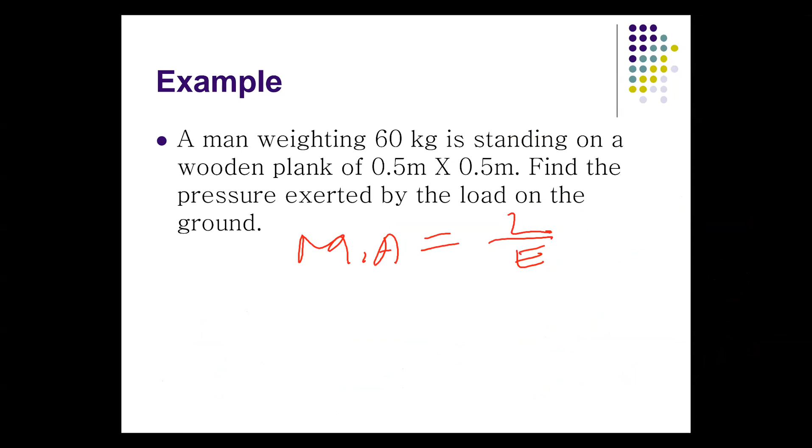So when you are writing MA, ideal situation, load over effort. Then AMA, this one has losses, that's L over effort by efficiency. That's the two differences there. This one is influenced by the efficiency of the device, this one is the ideal situation.

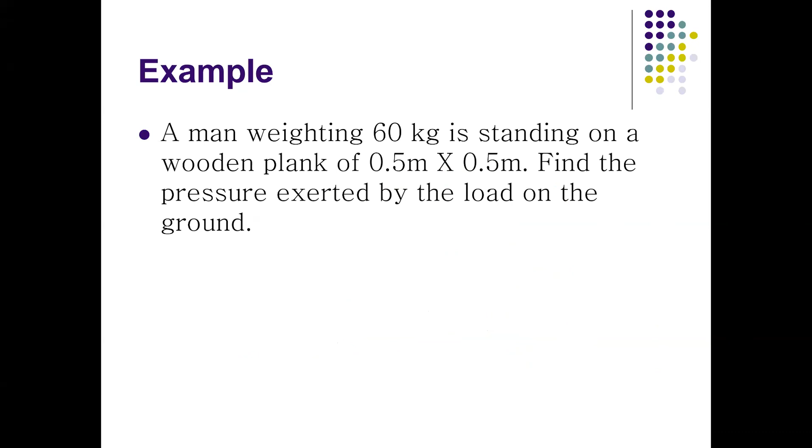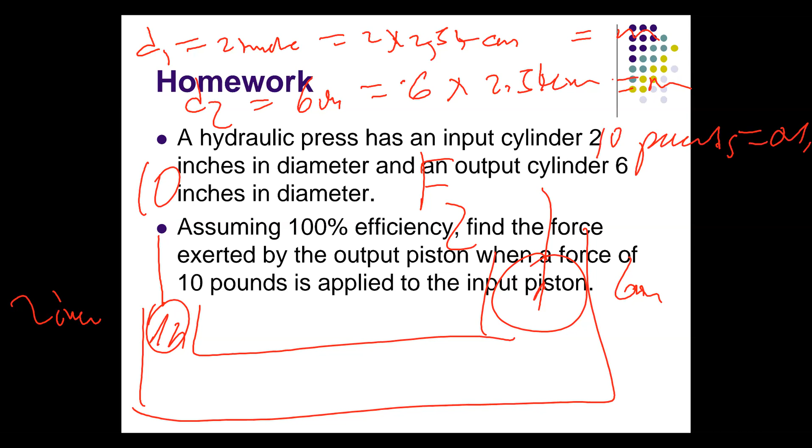Then the input force is 10 pounds, convert 10 pounds to newtons, and then do your thing. F1 over A1 is equal to P1, which is equal to P2, which is equal to F2 over A2. Then you're looking for F2, so F2 is F1 over A1 by A2. Plug in your values, calculate.

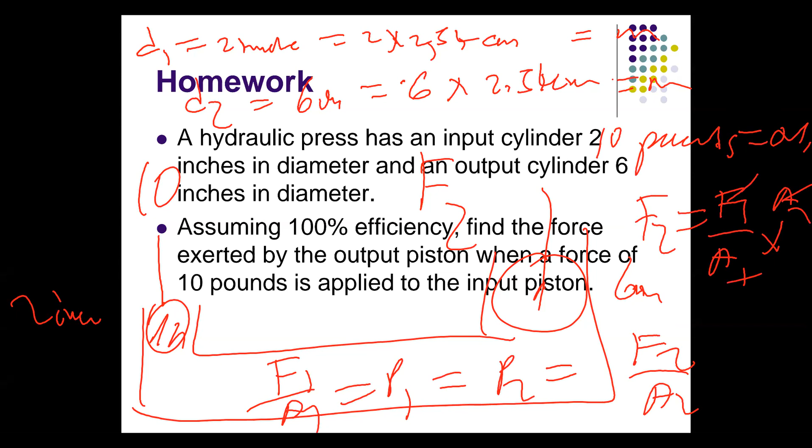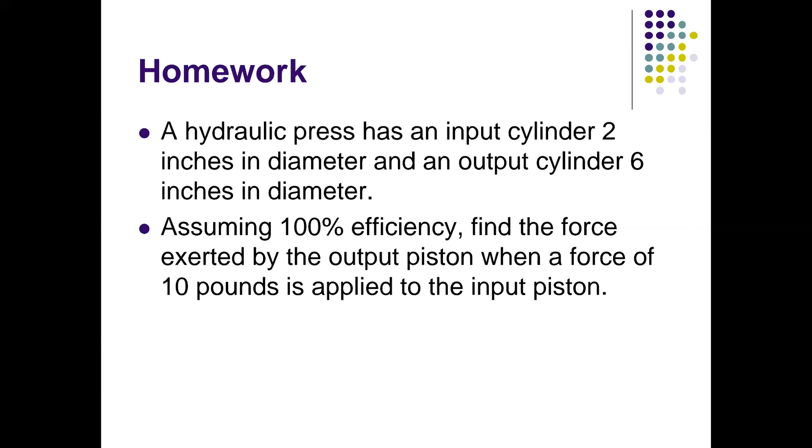Easy peasy. So now this is your homework to do on your own and see how far you will go. But I've just given you a pointer in seconds on how you can attack it when you are alone at home. And then we come to one important question that is always asked.

Are we allowed to use phones as our calculator? No, you can't use your phone in an exam or test. But for the questions we're doing, you can multiply by head. If you want to use a calculator, that's an advantage, but you can use your head, it's fine. For major tests, there will be no calculator. The questions will be simple, straightforward, that you can calculate, just multiply 10 by 500, 500 divided by 20, easy things.

The phone is not allowed in a test venue, no matter the circumstances. It's only except when you are writing online that we don't see it. Now guys, there's something important, one question which is always there in many exams, which I want to tell you so that you go and read about it. Most of the exams, this question is never missing. It's never ever missing, it's always there.

So, rounding off or not rounding off is fine, I don't care. You can round off to 1 or 2 decimal places or whatever, it's fine, I'll know, it's okay. Don't worry about that one.

And then there was someone raising a hand. Vincentia, you can go ahead and speak. Sir, you said if it says 100% efficiency, it means that the hydraulic is ideal, there's no losses. Oh okay, alright, thank you sir. Alright.

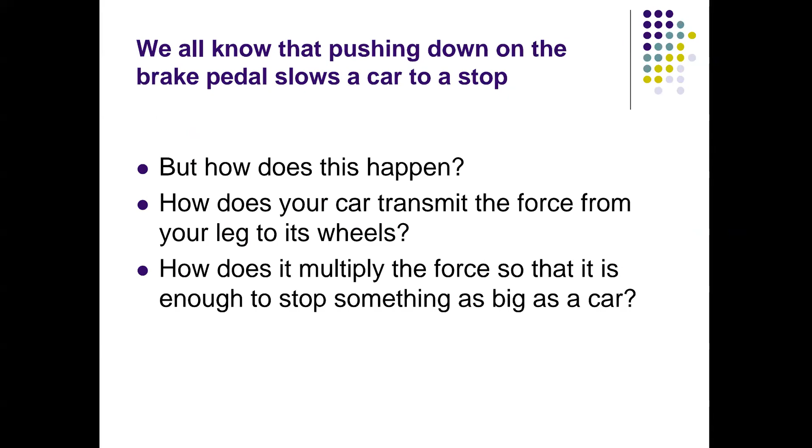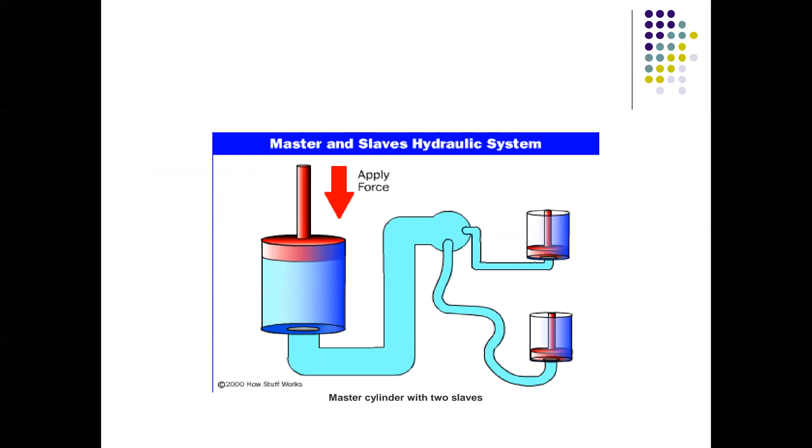Right, let me remove this. Do I have a picture of the braking system here to show you? Yes, there it is. So listen to the explanation, because usually it comes in the form of theory where you're writing sentences.

So how does it work? There are two things involved, two principles, 1 and 2. The first one is moments. I don't know whether you've learned moments before in high school, but it's the principle of moments. And then the next one is Pascal's principle, which we're learning today.

What's going on today, my pen is not writing. Pascal's law. Right.

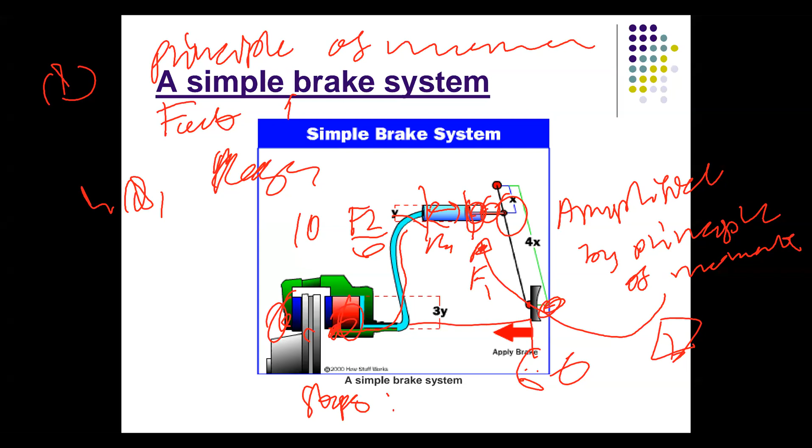So that means the force on your foot has been multiplied by almost 100 times. Hence it comes to your brake pads, which are for both wheels, equally. So that's how another example of the hydraulic machine is the hydraulic brakes of a car. Right, so usually that's why we say we're using ideal circumstances.

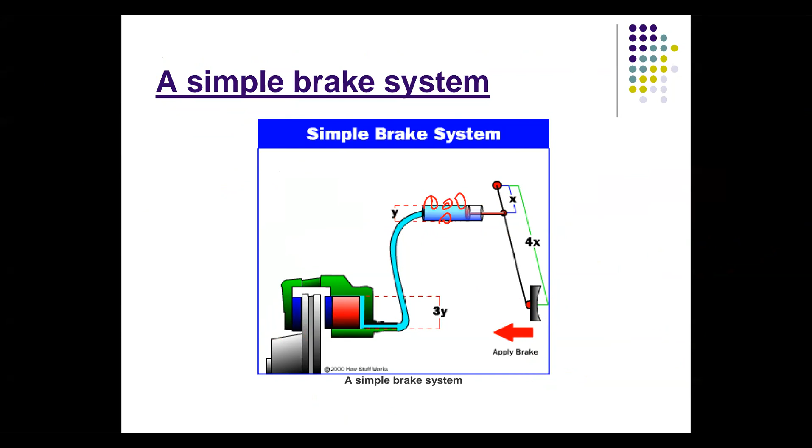Imagine if there was an air bubble in here, that would be a big problem. You've heard of the thing that the brakes failed. There was brake failure, that means this cylinder here had a hole, such that when they're trying to compress and use Pascal's principle, it was not working. There was now air, and air is compressible, so brakes don't work. That's brake failure, usually because the cylinder would have rusted, have a hole or something.

So that's one question which usually comes as theory, and I've just given you the answer. It comes, you give the exact answer that I gave you right now, 100% of those marks will be yours. Otherwise, comrades, I've come to the end of today's lecture, and I've come to the end of covering many things. So what's left now, comrades, is for us to revise.